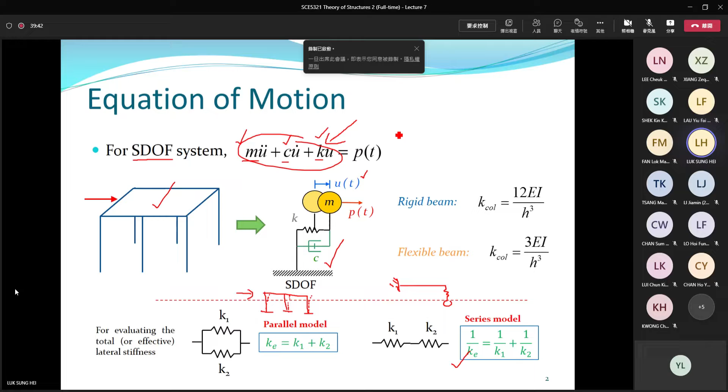For series model, you can calculate the equivalent stiffness using the formula at the bottom right-hand corner. Based on your structure, based on your model, calculate the equivalent stiffness and put it into this formula. Then you know the dynamic properties, M, C, K, very well.

And then in the next topic, topic 5, we introduce free vibrations. Free vibrations mean there is no external force.

But we have to give the structure some initial conditions. It can be initial displacement, it can be initial velocity. Displace the structure away from the equilibrium position at the beginning, and then let it oscillate without any external force.

We solve the equation together, and finally we get this solution. When you answer questions in the assignment, quiz, or examination, you can directly use this kind of equation. You don't need to prove it to me. You can use it directly, as long as you use the correct formula, correct equations.

This equation with A cosine, B sine, and the exponential function, this one is for free vibrations. Today, later, you will learn more and more equations for different scenarios. So pick the correct equation according to the problems, according to the questions.

This one is for free vibrations. If you're good in math, when you look at this equation, you know how it oscillates. Actually, this sine and cosine can be combined into one cosine function.

This rho is a Greek symbol talking about the vibration amplitude, and the exponential function controls the decay here. The amplitude will decrease as time goes on because of energy loss, so the structure oscillates back and forth about the equilibrium position with amplitude decreasing as time goes on.

Near the end of topic 5, there is one application about log decrements. We can use the outcome of free vibration to evaluate the damping ratio of a system. Damping is a very complicated mechanism. There is no theoretical formula to calculate damping directly, unlike stiffness.

For stiffness K, you can calculate it using E, A, length. But damping ratio, there seems to be no easy way to calculate it directly. Alternatively, you can use this kind of displacement response to evaluate damping.

This is the free vibration response for a system under consideration. You excite the structure so that it undergoes free vibration using your own method, and then measure its displacement history. Probably you will get a graph like this.

Then how to calculate damping ratio? You consider the vibration amplitude, the peaks, any two peaks, say for example U1 or U3, any two. Then record the time of occurrence, the time at which they achieve their maximum value, T1, T3.

Then you can use this logarithmic decrement equation to evaluate damping ratio. Here I express things in a very general manner, using any two peaks, peak i and peak i plus j. But for your application, you can use any two.

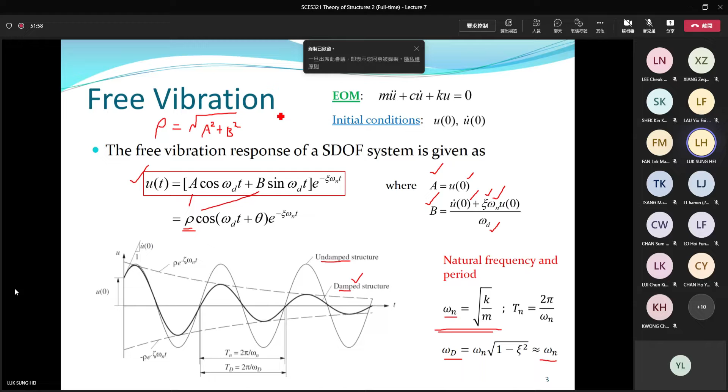And then part 2, displacement function. Actually, this one is A cosine, B sine, exponential function. So all the answers are actually right here. You can directly use the formula, but you have to give me the number. What is omega n? What is omega d? What is A? What is B?

Etc. You know the initial conditions: point 1 for the initial displacement, point 5 for initial velocity. So direct substitutions.

In example 1, we are playing with free vibrations. Free vibrations mean we have no force. Normally, I put down the equation of motion to understand the problems. No force, free vibrations, I can use this formula directly. For free vibrations, the displacement should look in this way: A cosine, B sine, times exponential functions.

There are two forms, right? In the notes, we mentioned that there are two forms. You may use the traditional form, A cosine B sine, or if you like, you may use the alternative form, rho cosine something, depending on which one you are more familiar with. Both equations, I will give you full marks if you use either one of them. Doesn't matter.

I put down all on the solution, but you can use just any one, either one. And then fill in the blank: find out what is A, what is B, what is omega D, what is omega n. Natural frequency, according to our discussion, natural frequency depends on K, depends on mass.

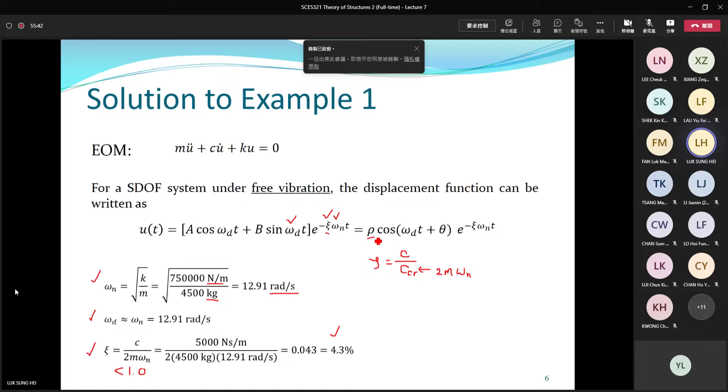So we know omega d, we know omega n, we know the damping ratio. It seems that the missing thing is A, B, or rho, depending on which form you are using in your answer.

In the next line, I just do substitution again to find out A and B. A depends on initial displacement, 0.1 given. B is slightly more complicated because it depends on speed, damping ratio, frequency, and also the initial displacement. It depends on more numbers, but I believe you should have no problem with these substitutions. Then you can find out B.

If you know A, if you know B, then you can find out rho. Rho is one thing you have to calculate in this question, part 1. Approximately 0.11 meters. Theta is the phase angle.

If you use the alternative form, then you have to also find out theta: minus tangent, arctangent B over A, minus 0.406 radian.

And then I substitute all the numbers back into our alternative form. So we have the displacement function for this system.

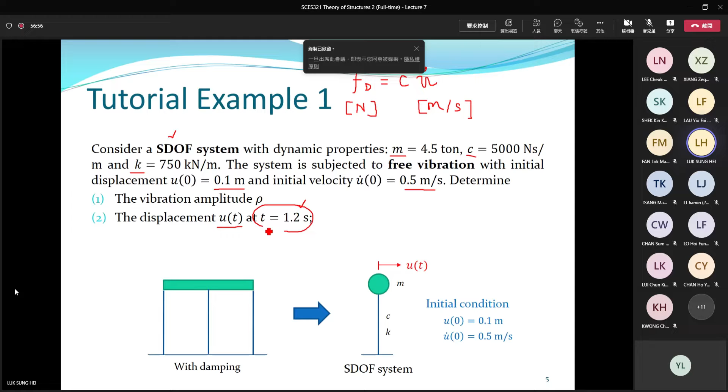Part 2, you are asked to find out the displacement at time equal to 1.2. So you can substitute t equal to 1.2 into the equation.

Minus something. To make things more clear, I suggest that you may also plot this equation using Excel to see how the structure oscillates with respect to time.

At time equal to 1.2 — here is 1, here is 2 — 1.2 is approximately, I think, here, something like that, in the minus region.

It seems okay, right? A very direct application of our solution for free vibrations. You understand how they change with time. That's example 1.

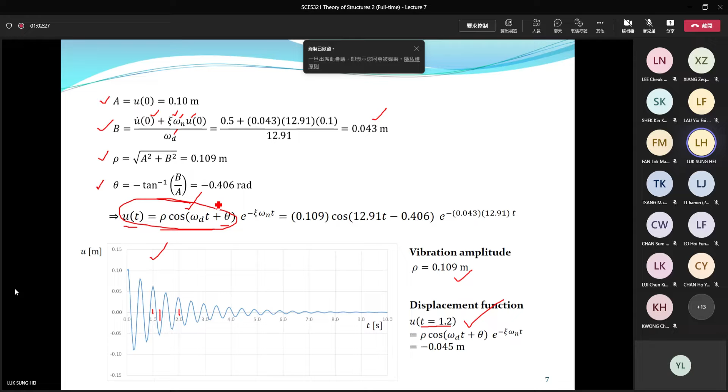Can we use this equation directly? We can't use it, right? Because this equation is valid if there is no external force. But in these questions, we have external force due to the self-weight, mg. So the net external force is not equal to zero. We have external force, so theoretically you cannot directly use our free vibration response for this problem.

But if you remember, last time in topic 4, we have one particular section that talks about how to deal with vertical vibrations. I think it's topic 4, section 3. We discussed how to deal with vertical vibrations. In this example, I will use that approach to deal with structures under vertical vibration so that we can apply the formula that we learned before for free vibrations. Let's have a look at how to use this trick to deal with vertical vibrations.

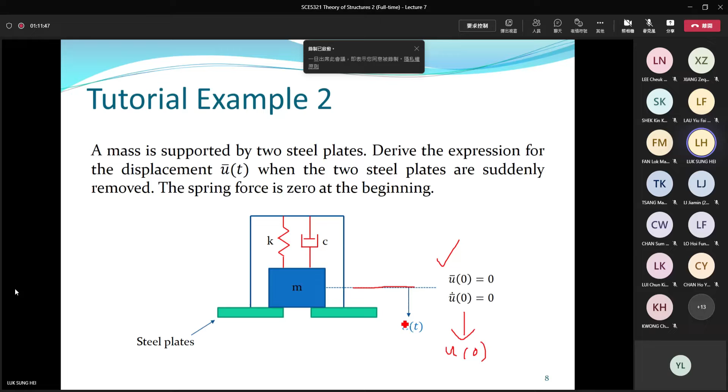U0, u dot 0, how? Don't think it's complicated actually, because you know the relationship between u bar and u. U bar at time equal to t is equal to u at time equal to t, plus delta ST.

You just substitute T equal to 0 into this equation. Then you can correlate the initial conditions described using U bar and U. I think I put the formula on the solution right here. You know the relationship between displacement and velocity. So you just put T equal to 0 here, and T equal to 0 here. Then you know how to translate the initial conditions from U bar to U.

U bar 0 equal to 0. U bar dot 0 equal to 0, according to the problem. So you can find out U0 and U dot 0 easily. This is what I do here, just simple substitutions. I found that U dot 0, the initial velocity, equals 0, while the initial displacement U0 is equal to minus mg over k.

U bar 0 equal to 0. So delta ST plus U0 equal to 0. Move delta ST to the right-hand side of the equation. Then you have these expressions.

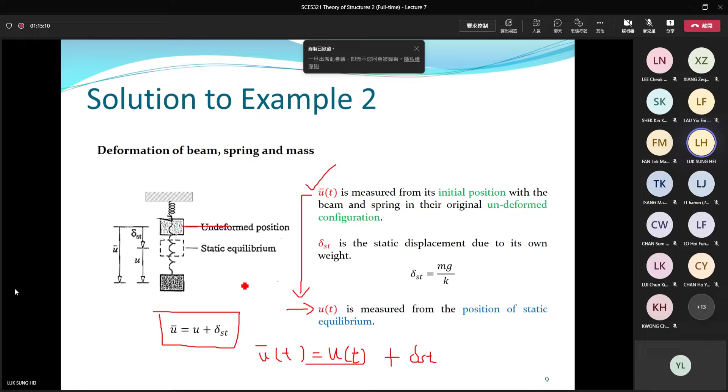There's one constant before the free vibrations. Okay?

You can observe from this equation, for a single degree of freedom system under a constant force, say for example under a constant force mg or a constant applied force, due to the other effect, the constant force will make the solution composed of two parts. One is a constant displacement, the other is a free vibration response. So you can also observe this from the example.

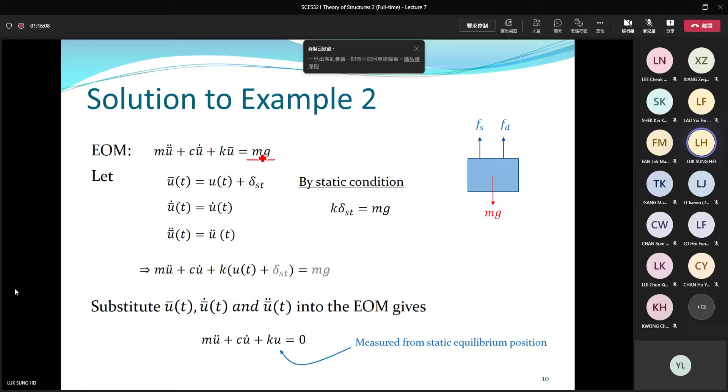If you get into math, if the right-hand side is not zero in our differential equations, we call that a non-homogeneous equation. For a non-homogeneous equation, the solution should compose of two parts: particular solution and homogeneous solution. So you can understand it physically or mathematically, I think.

I think this is the last example in this notes. Example 3 is maybe the more complicated example. This one is related to free vibration test. In the notes, topic 5, near the end, we mentioned that we can use free vibration to determine our dynamic response, dynamic property, dynamic characteristics, MCK. This example is actually talking about that kind of free vibration test.

I will go through the question one time, and then I will also give you a few minutes to think about what to do. Let me go through the questions to let you know what you are doing.

In example 3, we assume there is a one-story building. Assume that it can be idealized as a rigid beam, with assumptions of a weightless column, so all the mass is basically due to the slab.

We are asked to evaluate the dynamic property of these structures. Dynamic properties mean MCK - these three. They appeared in our equation of motion. We would like to evaluate our dynamic properties for these structures, MCK, using a free vibration test.

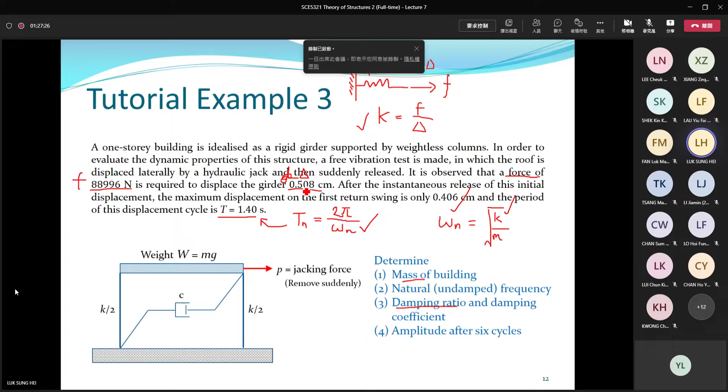Damping ratio - how to calculate damping ratio from a free vibration test. In the notes we discussed a concept called logarithmic decrement, using the displacement response of free vibration to find the damping ratio. You can use that one. You know the displacement result - I give you 2 displacements, at the beginning and after one cycle.

So if you plot the displacement graph yourself, it will look like this. At the beginning, 0.508. After one complete vibration cycle, 0.406. Then you can use the logarithmic decrement equation, using two adjacent vibration amplitudes, to find the damping ratio. So it's not that difficult here.

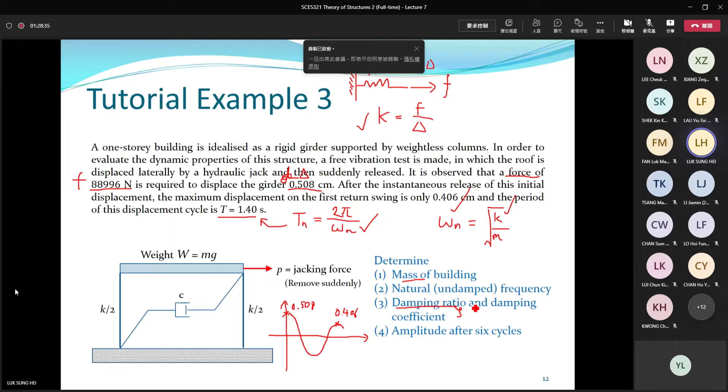Okay, this is how we can find the 3 dynamic properties, M, C, K, in this question 3. Let's look at the solution to see the numerical values. We mentioned the concepts here, but how about the numbers? Well, stiffness - you can evaluate stiffness directly.

As I mentioned, you know the force and you know the displacement at the beginning. So using stiffness equal to force over displacement, you can find stiffness: 17.52 times 10 to the power 6 Newton per meter. I use Newton per meter for the unit - if you like, you may change it to kilonewton per meter, something like that.

Mass - I calculate mass first in the solution. We understand that period equals 2 pi over omega, where omega n equals square root of K over m. So when you combine the period equation and the omega equation together, you can see that period equals 2 pi square root of m over k.

Change the equation a little bit. We arrange the equation, move mass on one side, move the other items on the right-hand side of the equation.

We know the period, 1.4 seconds. Stiffness we just calculated at the top. So when you put the numbers together, it becomes our mass, 870 tons, or you may use kg. So you know mass, and you know stiffness.

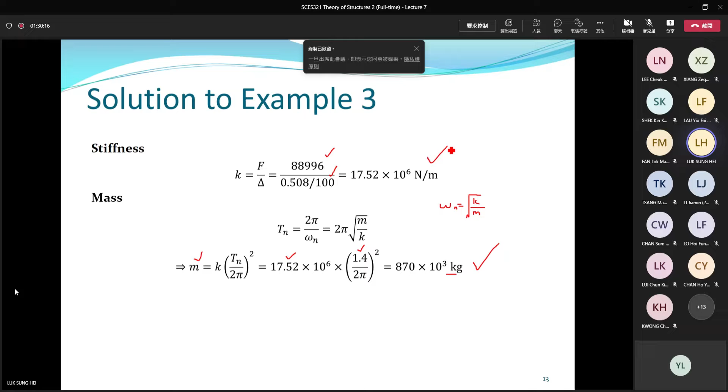But the question also asks you to find omega. So there's one step here: find out omega n. You can calculate omega n using the period, or you may calculate it using square root of k over m, depending on your own preference. Since you know stiffness and mass, you can calculate omega using the definition, square root k over m, or you may use the period to evaluate omega n.

This is part 2 for this problem, natural frequency. Just again to recap the concept, how to calculate frequency.

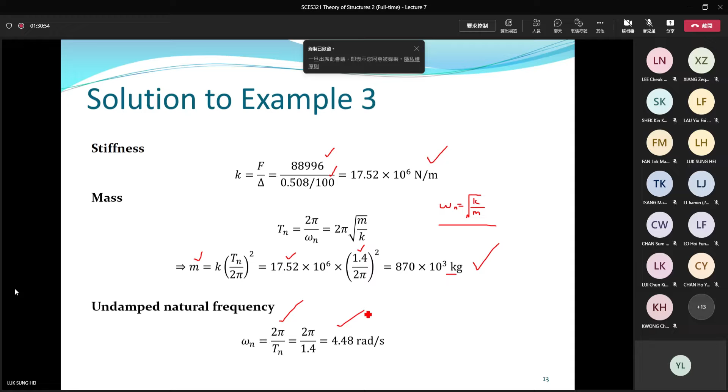For the damping property, you can use the log decrement equations, because you know the displacement graph: you know the value at the beginning, and you know the value after one complete cycle. So here you can easily use the log decrement equations.

I first calculate the natural log of U0 over U1. U0 is 0.508. After one cycle, the displacement dropped to 0.406 according to the problem. They are different by one cycle, adjacent to each other. Take the natural log first, and then put it into our damping equations.

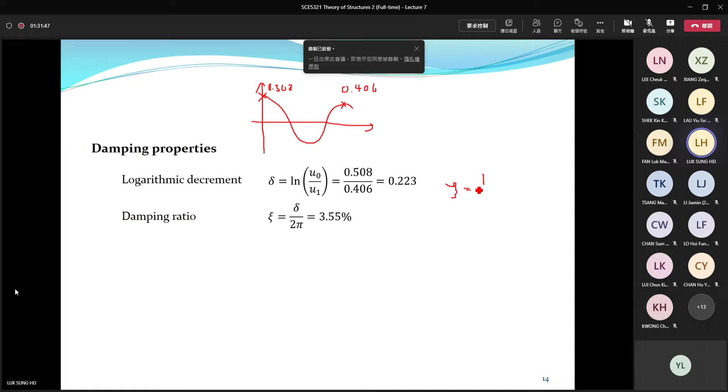When you read the notes, the equation should be something like this: 1 over 2 pi j, natural log of ui over ui plus j. This is the formula you find in the notes. Here, j is 1 because they are different by one cycle.

J is 1. So the damping ratio is equal to 3.55%, small damping. Now we know the damping ratio.

The question also asks you to evaluate the damping coefficient. Damping ratio and damping coefficient are related to each other. Recall the definition of damping ratio: it's the ratio between the damping coefficient and a critical number, 2m omega. So if you know one, you can evaluate the remaining damping numbers. Here we know the damping ratio, so the damping coefficient C is equal to 2m omega times damping ratio. That's why you can evaluate C easily.

You know mass, you know frequency, you know damping ratio. The unit, as I mentioned in question 1 already, is force over speed, Newton-second per meter. Be careful about the unit for damping coefficients. So now we know damping, and we know all the parameters: M, C, K.

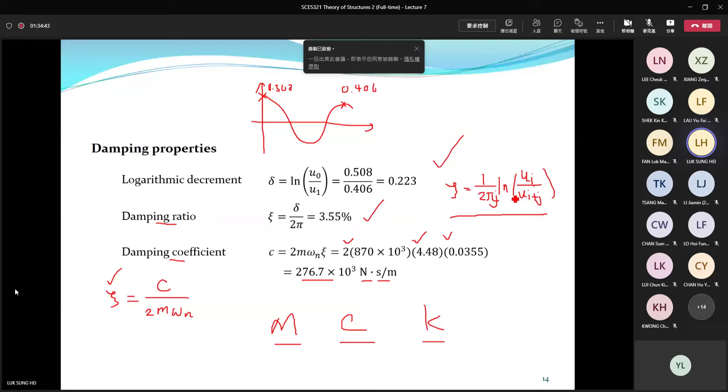This equation is also quite useful to understand the new displacement after n cycles. You put J equal to 6. You know the damping ratio, and you know the initial displacement U0. You just need to find U6. Then by doing the calculation using our calculator, it seems that the displacement after 6 cycles drops to 0.133 cm.

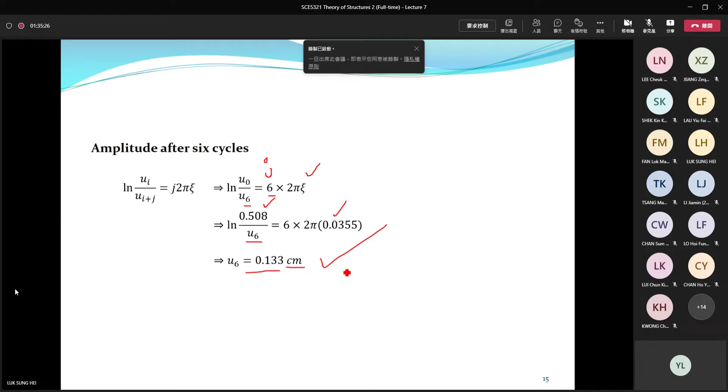Okay, these are all about our tutorial 5 for free vibrations. I hope the 3 questions help you understand the possible questions you may encounter. We handled question 1 and question 2 about the direct application of the formula using free vibration response. Question 3 is quite different—we use a lab to find out the dynamic properties.

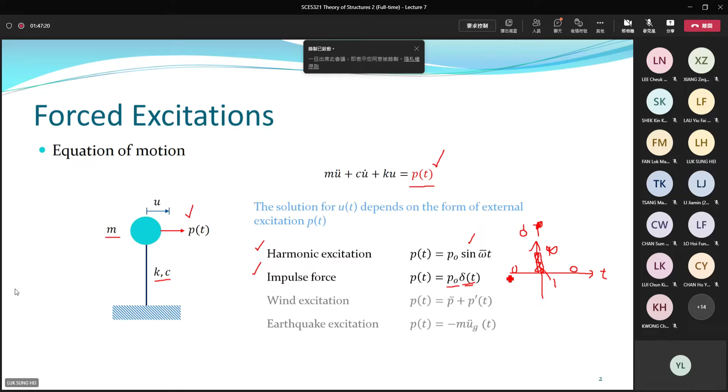What I mean is, when you measure the wind speed — wind force depends on wind speed, right? The higher the wind speed, the higher the wind force. When you measure wind speed, normally we find it oscillates above or below one mean level. So in terms of nature, the force can also be divided into a mean part and a time varying part. Wind force, if you want a precise answer, can also be modeled as dynamic loading: the mean part plus the dynamic part.

But for our design, you will learn how to use the Hong Kong wind code very soon in the next semester. In our design we normally use a simplified method, treating wind speed as something like a constant force to make the calculation easier, because normally engineers don't want to consider too many dynamic effects.

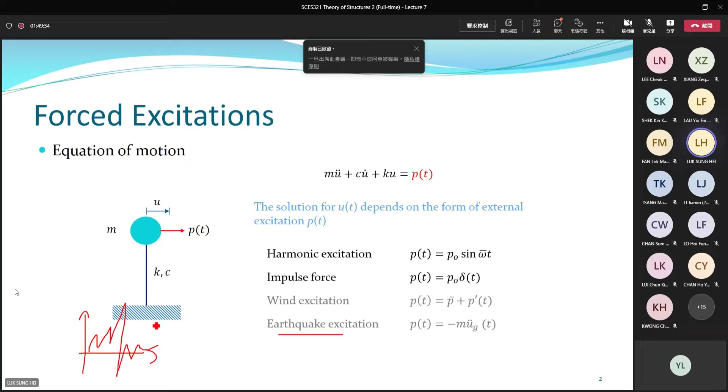We firstly talk about harmonic vibrations - a sine force, simply speaking. And then we will go through the applications. There are several applications for harmonic vibrations, some are quite useful. We normally use a sine force to discuss forced vibrations.

And then we will move on to impulse loading and one useful technique called the Duhamel integral, a very famous concept. Although it's difficult to apply, it's very, very general. And then we go to pulse excitations. At the end, there is one chapter called periodic loading.

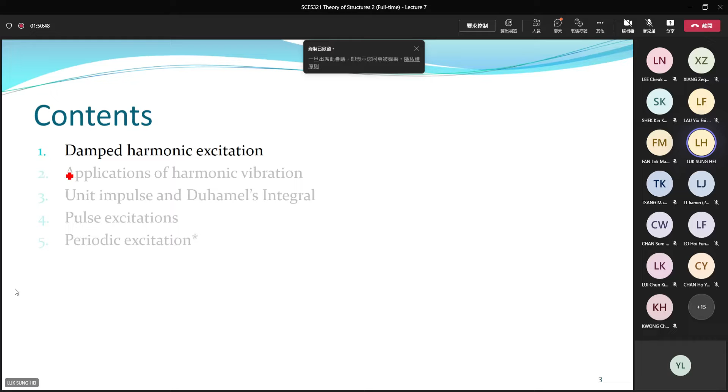At the beginning, we focus on damped harmonic excitations. When you read the textbook, some textbooks will also show you undamped harmonic vibrations, but I think undamped is not that common. So here I directly go to damped harmonic vibration. If you want to know the undamped behavior, you may go to the textbook, although I think it's not that realistic. So to save time, I directly go to a damped single degree of freedom system.

Under harmonic excitations - harmonic means sine or cosine - we normally assign a sine function to describe the force. I put a graph to make it easier to understand what a sine force is, as shown in blue color. A sine force starts at zero, then increases to our amplitude, P0. Then the force drops to the negative direction and increases again - a sine force. The time required for the force to complete one cycle is equal to T.

I put a bar on top to make it different from the structure's natural period. This T-bar is talking about the time for the force to complete one vibration cycle. It's talking about the force, not the structure. The structure itself has its own natural period - they are two different things.

So this is the equation of motion: M u double dot plus C u dot plus K u equal to the force. The force is P0 sine omega-bar T. Omega-bar is called the excitation frequency, or you may call this the loading frequency. The loading frequency is somewhat dependent on the loading period here, T-bar.

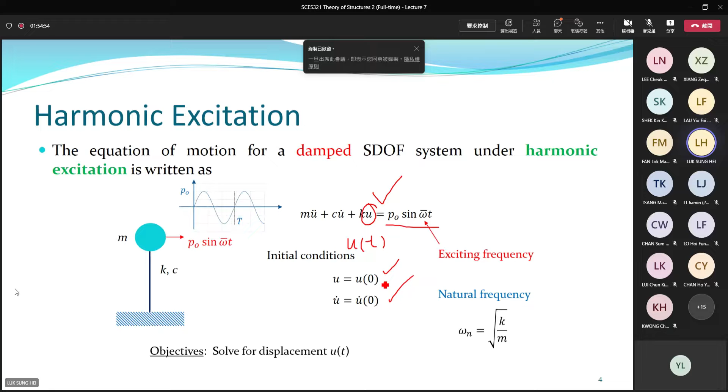In topic 5, we learned how to solve the equation under free vibrations with no loading. Here, we have force. So how to solve the problems?

The problem definition is here. For a damped single degree of freedom system, we have our governing equations with initial conditions. This equation is a second order non-homogeneous differential equation. For non-homogeneous equations, the solution will be composed of two parts: the homogeneous part and the particular solution.

The homogeneous solution simply means the solution for a homogeneous differential equation in which force equals 0. I call this homogeneous part UH, the homogeneous solution.

We have to find out UH first, but this one we already handled in the previous chapter, topic 5. If force equals 0, that means we are talking about free vibrations.

So UH is known from free vibrations. UP, this one is called the particular solution. The particular solution depends on the loading. For sine loading, you have one particular solution. For impulse loading, you have another, and so on. The particular solution depends on the function on the right-hand side of the differential equation.

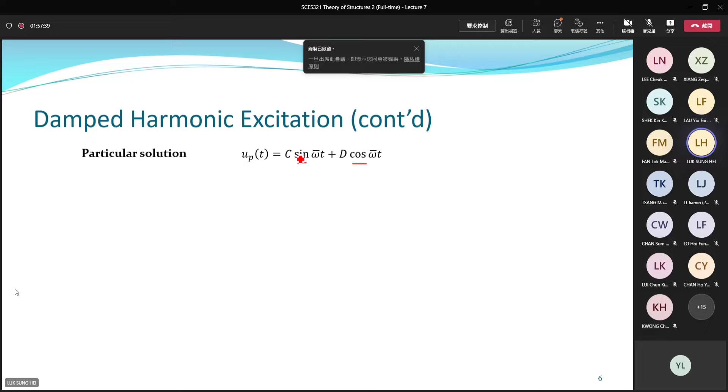Now, one difference is that this sine function depends on the exciting frequency of the loading, omega bar. The sine and cosine functions depend on the loading frequency, omega bar. And there are two coefficients, C and D, that we have to evaluate.

I put the derivations on a few pages later. If you like, you may look at the derivation yourself. Here, I directly give you the expressions for C and D. It's not too complicated: C is here, D is here.

Later, we will do some conversions, so this is just for your information. Later on, we have more simplified expressions. C depends on P, the force amplitude over stiffness, and then 1 minus beta squared, plus 2 damping ratio beta. There is one new term in these expressions.

Beta. What is beta? Beta is another useful parameter that you have to remember. Beta is called the frequency ratio. The definition is the loading frequency divided by the natural frequency of the system: omega bar over omega n.

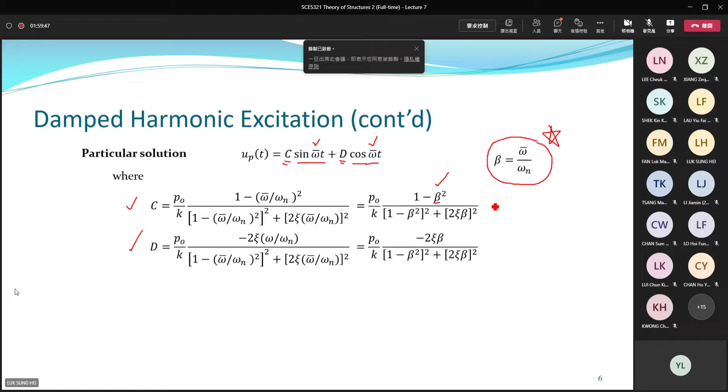The particular solution: C sine omega bar t plus D cosine omega bar t. The homogeneous solution means taking force equal to 0, which is equivalent to our free vibration response. UH is our free vibration response. We know UH, we know UP.

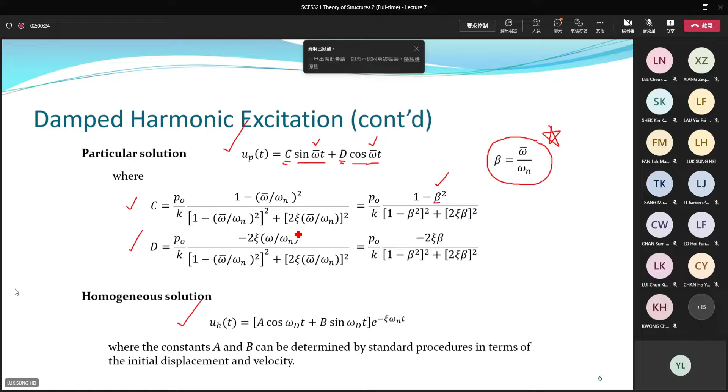So now you can put the two things together to form our general solution for the equation. Total displacement equals the homogeneous solution UH plus the particular solution UP. This is the general solution for a single degree of freedom system under harmonic excitation. It's quite complicated, right? There are 4 coefficients: A, B, C, D.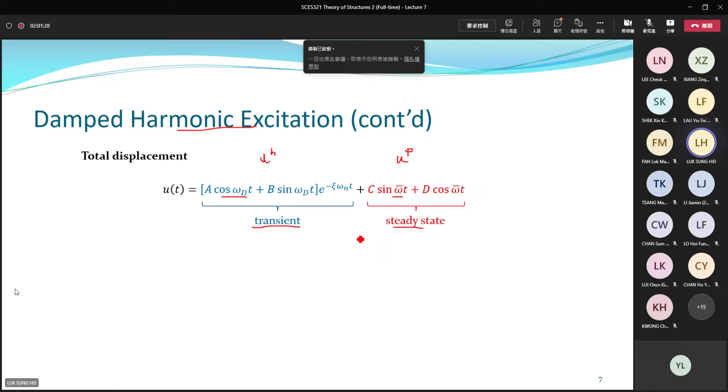Transient response for the blue part; the second part, the red one, the particular solution, we call the steady state response. What is transient and what is steady state? For the blue part, you can see there is one exponential function, which is a decay function. Decay means as time goes on, toward infinity, this...